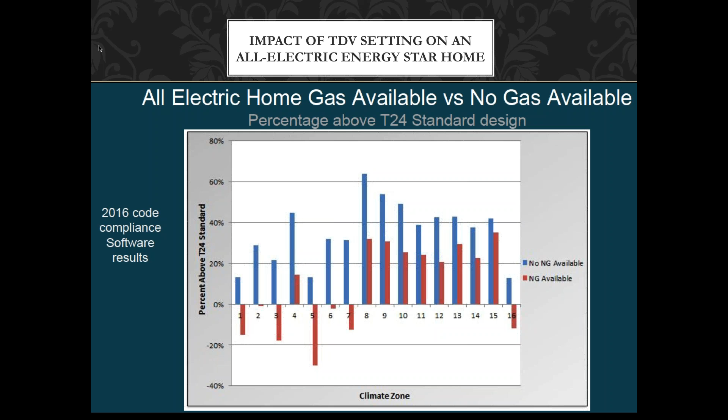You all of a sudden are trying to put gas into your house to fix this problem that you have that you don't have. If you just use electric space heating, hit the toggle right, everything works fine.

So, Gil, just last night, I got Palo Alto's study redone for you. Great. So, TRC, when they took all the different scenarios of electrification in Palo Alto, what they found is their percent compliance with natural gas available for space heating, just the toggle. They found this percentage above in 2016 code software: 7, 11, 6, 10, -6, -5, 6, 6, -6. Similarly, now it's at 30, 33, 27, 30, 15, 14, 5, 5, 1, 2, 16.8. This one here, it never complied. It was a problematic building, so this is not the issue.

And that's how important it is to do a cost-effective study. Just the acknowledgement that if you have gas space heating versus electric space heating, there's a different TDV setting for that. You get huge differences. This is what you guys got, and your cost effectiveness comment that you made earlier is based upon this. This is the reality for all those buildings, how they actually pay for their energy, and this is what it should have been for electric space heating.

So all electric construction is cheaper. This is one of our commissioners, David Hochschild. Thank you. I haven't met him, so.

So he said, this is an editorial that was published a year ago, essentially, with, I think, Cal ISO, one of the regulators as well. Electrification can also reduce costs. California home builders such as City Ventures and KB Homes have begun building homes without gas lines, where gas central heating, hot water, stove are replaced by electric appliances. By avoiding the need to install gas pipelines under the streets and inside the homes, these forward-thinking builders are able to reduce the price of the home by $4,500.

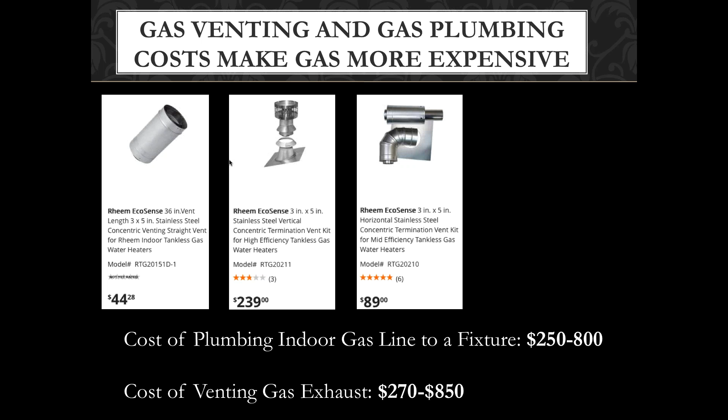Now, the nature of affordable housing, take a quick detour, is that your rent and your utility bills are both regulated. So if you have a $300 total rent plus utilities, within that $300, is that $295 in rent and $5 in utilities? Or is it $220 in rent and $80 in utilities? In this scenario, because they have $5 utility bills and minimum monthly charge, we're able to get $295 in rent and $5 in utility bills, with $300 being the cap that they can pay for the combined.

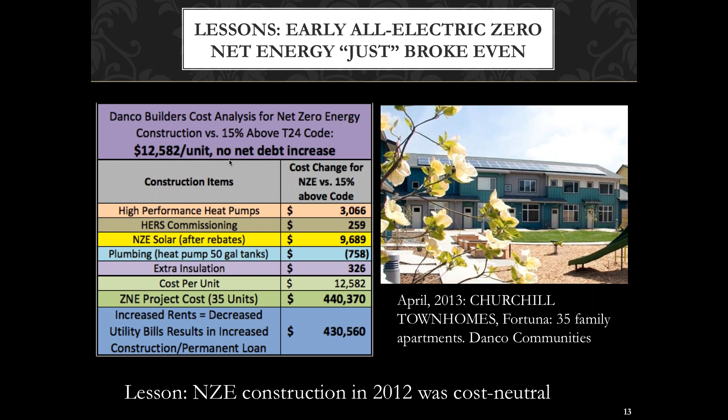This gives them no utility bills both in the summer and the winter time. Their money every month is stable and flat. It's nice that their expenses are also, as opposed to making their kids suffer or having to make really awkward choices about how to keep it going. Because these are the people who are doing a lot of difficult work for you for not much money.

Another low-income project. I want to show how this works out. So this is fuel switching. Last one is new construction, just to prove out that it's cheaper to do it that way. So this is in Escondido. This is post-retrofit in the middle. You can see solar arrays in front of the pool house. You can see all the solar around there.

Notice that they wasted this roof line and this and this and this. Only in this one did they put the solar up on the other side of the roof line, which is a common strategy if you're trying to add more solar, or make the panels more efficient so that they take up 2/3 as much space. A lot of strategies to densify solar effectively that people might not be aware of, but if you're a solar installer, you know what you're doing.

So this is a for-profit affordable housing developer, Affirmed Housing. We've done a lot of projects with them. They love this fuel switching strategy. So up on top, this is the money talk. We've got 1, 2, and 3 bedrooms. You can see the number of them, 36 and 19 and 1.

Their electric bills are minimum monthly charge $5.17 to $5.42. Gas bills that are left over are $14, $16, and $16. So the total utility allowances are $20 essentially for all 3 apartment types. Now, when I was going through the math, I'm like, what if we'd done different scenarios?

What they actually ended up doing was they switched out their HVAC system and their cooking. Unfortunately, there's a little thing there. For an additional $25,000 for the whole project. They were about to put in gas furnaces and air conditioners. They put 6 of them in. We said, whoa, wait a minute. What about the heat pump strategy? And they're like, well, we're kind of already going.

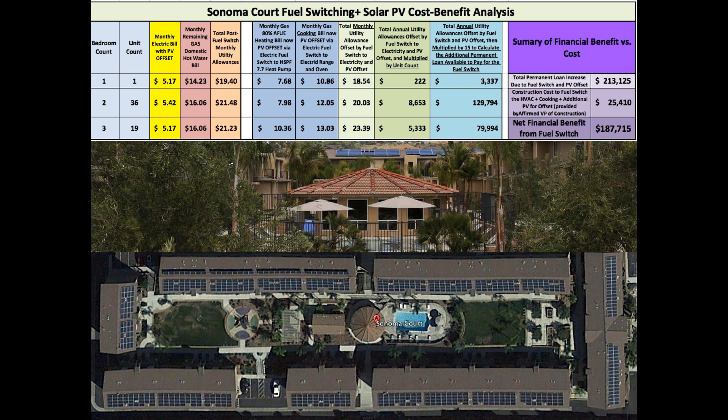And so what we put in there, there's windows that were retrofitted in, there's the HVAC system, we did duct leakage testing, the domestic water heater, which is gas, that I pointed out. Notice the efficiency gains of putting in a 0.70 Energy Star certified gas tank, 4.3% in TDV versus 15.3% putting in the HVAC system. If your goal is your percent compliance over, which is a threshold for affordable housing, 10 to 15% depending upon your funding, and you have to make choices about how you get to your 10 to 15%, much easier to do with your HVAC system.

Obviously the windows could go in, but those are expensive by comparison, $400 to $500 per window. So cost effectively, they put in the windows because they were going to put in the windows. They put in the HVAC because it made them a good deal of money. And it's still efficient. I want you to see that. It's still doing terrific results on our improvements.

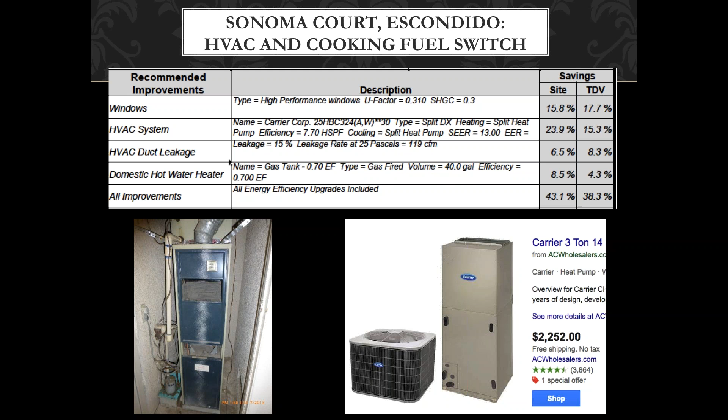So I've become expert in the products that are the smallest amperage. I have a whole handout. If you guys want an email, I'll give you every scale of like what's a 10 amp water heater, what's a 12 amp, what's a 15 amp, what's a 20. That matters for retrofits because your panel size probably has to stay the same, probably. Otherwise, they're going to trigger upstream retrofits and the transformers.

So with this system, I want to see, who says replace the water heater? Just do the hands thing. Just for now. Okay, very simple. Thanks. Okay, who says the wall furnace? Okay, what do you think the wall furnace should be? Just throw it at me. What should it be? What's your recommendation? If you think a mini split, good choice. Wrong, good choice.

The PTAC, what should that become? External heat pump. So you think it should be the same thing, PTAC. And then you got your 80 amp panel. So what we did, when we did our analysis, we found that we just put in a PTAC with resistance heating in it. We put in the exact same size product.

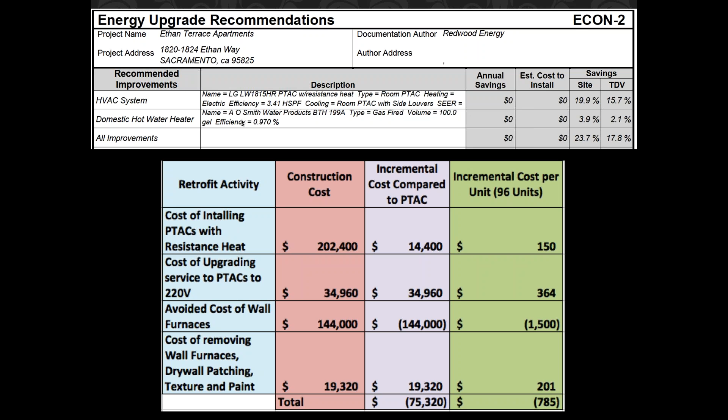We get 15% because the air conditioner was so bad that even a really crummy, minimally compliant air conditioner today is 15% better.

So Bridgeville Elementary, they had propane tanks. This is out in my neighborhood. This is the Mad River right next to it. If anyone watched the Simpsons, there's a Simpsons episode about how the Mad River is named. It's sort of true.

So they had solar already on the roof. They had these propane 80% efficient furnaces. The solution was to put in this low temperature heat pump. I mean, it can get cold, and it still puts out 100% of the BTUs. It's got a double compressor, so it's not just doing it once, it's doing it twice. You can find these products in mini splits and significant, big ones, totally available.

It was cheaper. Propane is a very expensive fuel source. It was more dependable. Sometimes they had difficulty getting propane trucks to go way out into the sticks where this is, little winding mountain roads. Weather dependent, of course, there's landslides sometimes. Their electricity was their more dependable fuel source, and it was cheaper.

And this is one of the interesting things. We can check out the efficiency and say, oh, putting in the ductless mini split says 11% savings in TDV, and the little fan stuff, so we get 12% out of it. But what you might not realize is that since they didn't have air conditioners, the kids were sweating during the summer, trying to take any summer classes. And so they're running the fans like crazy. They would blow air through this furnace to get some moving air in place.

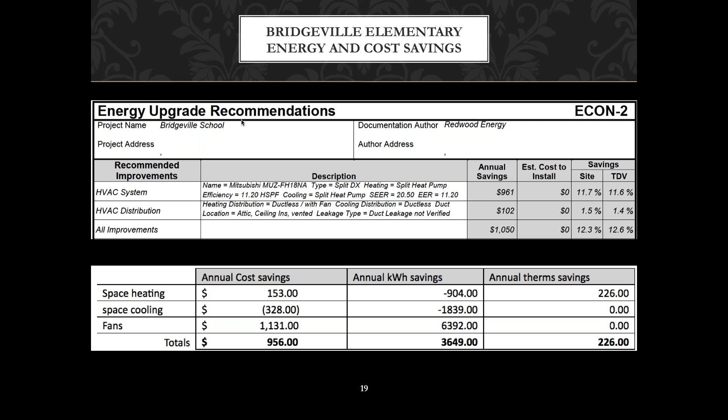So the huge savings that they had, 6,392 kWh, was because they're using a ductless mini split to provide air conditioning. Adding air conditioning reduced their energy costs because the fan was so ineffective and running all the time. So you might think, oh no, adding air conditioning. How do kids learn? How do we learn when we're overheated? We don't. So it was important for just a school.

You guys, anyone know where this is? Okay, so this has got such a cool system. Two weeks old now, but it's got Sanden heat pumps in the basement providing domestic hot water. So they're ganged up, and they're replacing this old junker. This is not the actual photograph, this is the design strategy where you have multiple compressors and multiple tanks of storage, and you can plumb them in parallel or in series. There's discussions around which way actually produces the most efficiency.

But what we got by putting in the Sanden is 41% site savings. Because electricity is pricey, we got 18% in the TDV cost savings. The windows, which they didn't do because they're too expensive. Ever tried to put windows in on the 9th floor of a hotel? Imagine what that might involve. So, yeah, it's a good idea, but it's not.

And going into the mechanical system was really the only choice. You couldn't touch the shell. You go to New York City, you cannot touch those shells. Those are historic buildings, every single one of them, and they're all uninsulated. There's nothing in the walls. And yet, you don't get to touch them. So working on mechanical systems and understanding what you can do by pulling out one system and putting in something radically more efficient is the appropriate approach.

Let's see here. Then, I wanted you to see this. So Bright Power's from New York City, and they're totally hot to trot putting in cogen. Ooh, that's like burning more gas. And so we modeled this. This is what that would look like, because cogen is essentially a water heater that produces electricity. Incidentally, dirty, nasty electricity over there. We thought it would be so cheap.

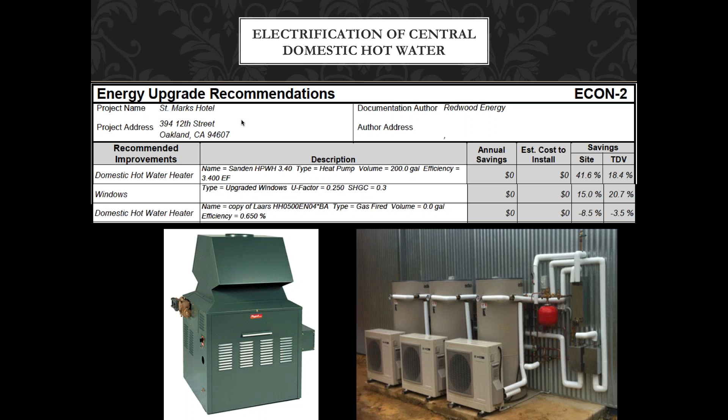Look at this. They can't even get a TDV savings, -3.5, by putting in cogen. And they kept on trying to figure out some other workaround. Like, no. If it's a dirty burn, it's a dirty burn. End of the conversation. There isn't some workaround, there isn't some new way of looking at it. You can't put in cogen, it's a dirty burn. And I want you guys to keep that in mind, because people in San Francisco think that's a good idea. It's a crummy idea, and you can't get through it.

So Deliverance Temple, this is in Richmond, and it's about 5 acres of low-income housing. You can see here their wall furnaces. Here we have a 40 amp breaker, that nasty thing. And this is similar, I think that's a 50 amp, this one actually even has 30 amp breakers.

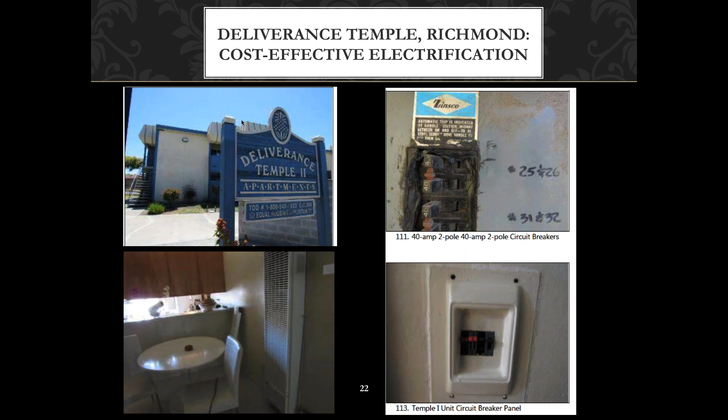So in that challenging circumstance and on a limited budget, the solution was to get new gas wall heaters. We have not fuel switched because we couldn't do much with the breakers, but instead we went to central water heating systems. So we're taking out the nasty old gas burner, sticking in two Sandens in the same spot.

The savings, if we put in wall insulation - they're uninsulated, but almost uninsulatable as well - that would have been great if we would have gotten 35% savings. The TDV savings for the HVAC, putting that in, we got 22% site savings with negative 25 on TDV.

This is because we don't have the space heating button set on this specific model. This is an example of what it looks like when you're going to have an argument with the jurisdiction about what should be the button that you push for space heating. Negative 25 - doesn't matter how much site savings you get, that cost of the electricity at the wrong setting crashes your model.

So then we have the domestic water heating. We got 15% on site, 10.3% on savings. And that is what was done. The minimum threshold was 10% savings, and we could do it with just the water heater.

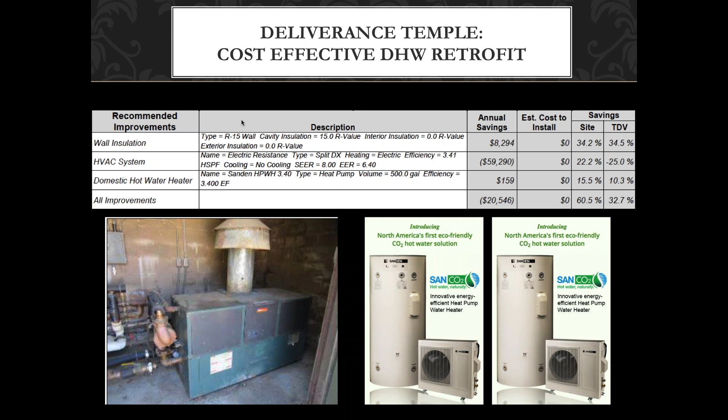2 minutes. Go ahead, 2 minutes, thanks.

This is 324 apartments getting the exact same treatment, same owner, just like a few blocks away in Richmond. Taking out the nasty, putting in the better.

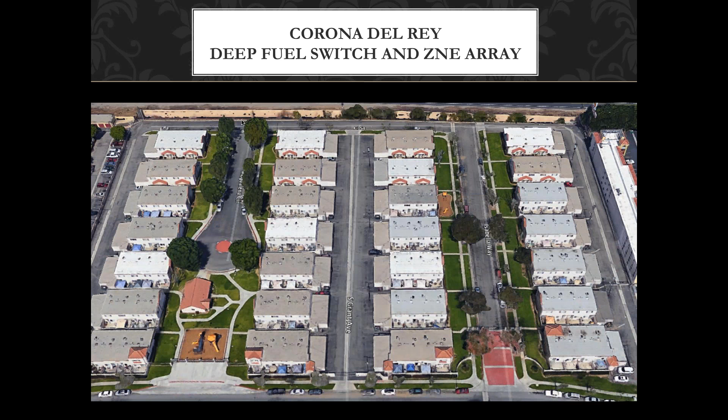And that is the one measure that's consistent. Rachel confirmed water heaters are cost-effective to switch out all over the place from a carbon perspective.

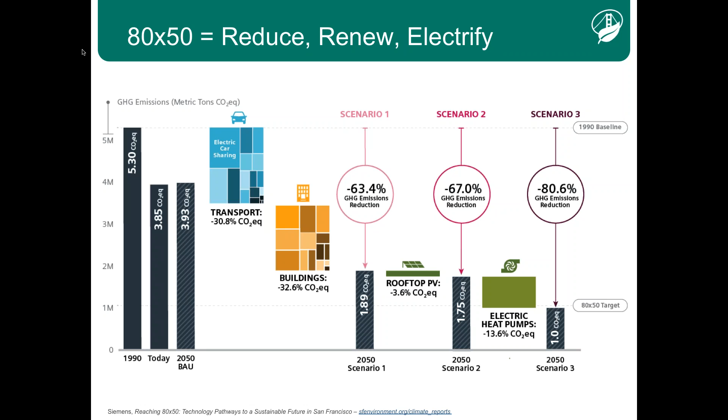The bottom line is we were not able to come up with a scenario where we get to an 80% emissions reduction by 2050 while still supplying thermal loads in buildings with natural gas. Heat pumps were the single biggest isolated measure, and that's driving a lot of interest first in ensuring we're not in the way of adopting that technology, and then advocating for the more thorough understanding that's necessary. So that's one bit of context.

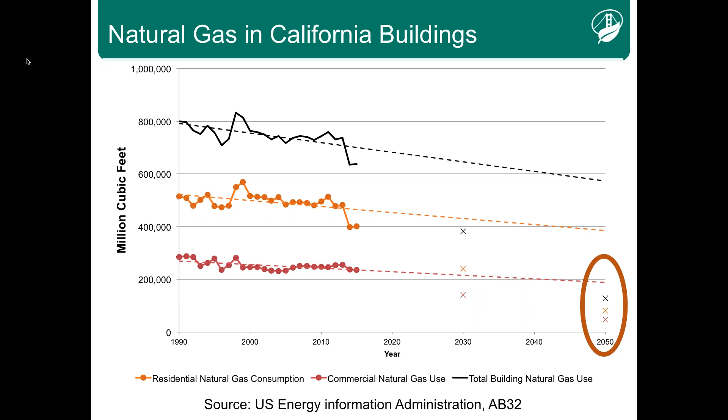Another way of looking at this is to take the Energy Information Administration data—another person set this up and produced this graph, but I can't give them credit—and simply plot the EIA building natural gas consumption data for California. We do have a positive trend that natural gas consumption is declining, but the trends don't match up with our buildings providing their expected contribution to the state's greenhouse gas emission reduction goals. So this is playing out both at the local level and in aggregate at the state level.

That's part of why this is a very non-abstract conversation we're having. What I really appreciate about the three perspectives offered this morning are the practicalities of education for us, local officials, from Russ; the state being very conscientious in developing frameworks to support efficiency for decades now; and the need to rethink the underpinnings of some of the minutiae of that. What used to be minutiae has become critically important.

So I'd really love to tee it up with a bit more discussion, and give you a chance, Chris, to respond on this particular question of the conditions where the local official has the authority to designate natural gas available, or approve natural gas being available or not.

I'd just add, in addition to Sean's presentation, a source where I don't feel what's communicated to the official is as clear as how you presented it: if we look at the Residential Alternative Calculation Method Reference Manual, the guidance is that for newly constructed buildings, natural gas is available if a service line can be connected to the site without a gas main extension, right? So there is written regulatory guidance that isn't quite as simple as that.